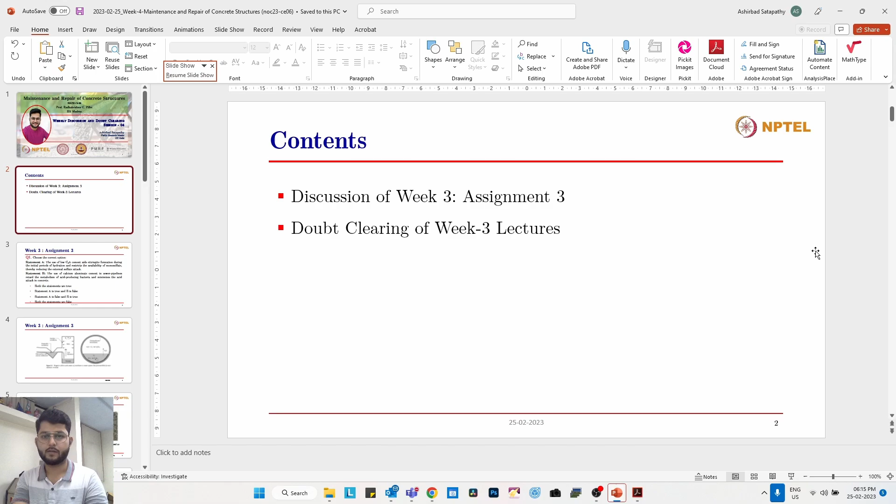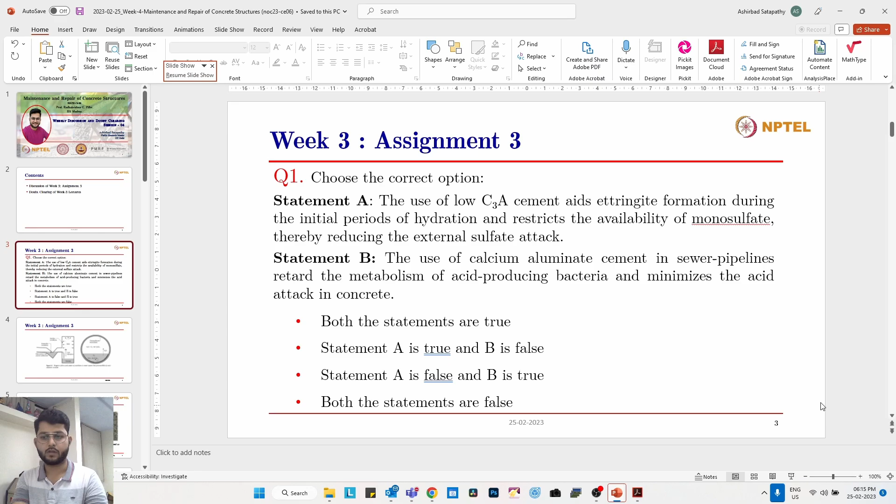Yes, I have allowed your mic, Dr. Satish and N. Sindhu. Yes please, you are audible and the screen is also visible. Okay, and when I'm changing the slides, is it also working? Right now nothing has changed, only the title is shown. Can you check now, can you tell me now? Yes, yes, it is changing, okay. Alright, okay. Thank you, Dr. Satish.

Yes. It says that use of low C3A cement means we are talking about sulfate resisting cement. It aids ettringite formation during the initial periods till the available C3A reacts with external sulfates. After that, since C3A is not available, formation of tricalcium sulfoaluminate will not take place. So statement A is correct.

Now coming to statement B, the use of calcium aluminate cement in sewer pipelines retards the metabolism of acid producing bacteria and minimizes the acid attack. That has been found to be correct. So both these statements are correct.

Okay, so you want to say that both the statements are true. Yes, thank you. Thank you, Dr. Satish. So before going to the second statement, I want to say something about statement A.

When the C3A content in the cement is low, what essentially happens during the availability of sulfates is that when sulfates are present, the ettringite is stable. This ettringite to monosulfate conversion is kind of a chemical balance equation, so both the ettringite and the monosulfate phase coexist in the cement pore solution. But depending on the amount of sulfates present in the pore solution, one of these phases is more favored. When sulfates are more, ettringite formation is favored, while monosulfate is less in amount.

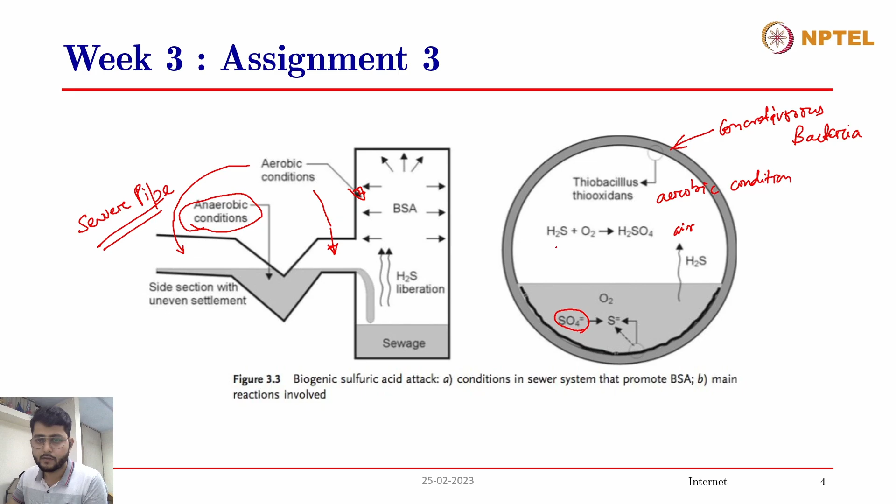Now, under anaerobic conditions, the sulfate in this sewage water gets converted to sulfide, and this hydrogen sulfide gets released into the air. These thiobacillus thiooxidans are present inside the sewer pipes generally in these kind of conditions - these are bacteria, also known as concretivorous bacteria. These bacteria, in aerobic conditions, facilitate the oxidation of this hydrogen sulfide, so oxidation takes place, and in turn forms this sulfuric acid.

This sulfuric acid can be in the range of 10% concentration, which will effectively reduce the pH to less than almost 1. This 10% sulfuric acid will cause deterioration of the concrete in these portions of the sewer lines - you can also see this in the lecture slides and video. The top of these sewer pipes gets affected, the concrete over there gets deteriorated due to the sulfuric acid attack caused by these concretivorous bacteria.

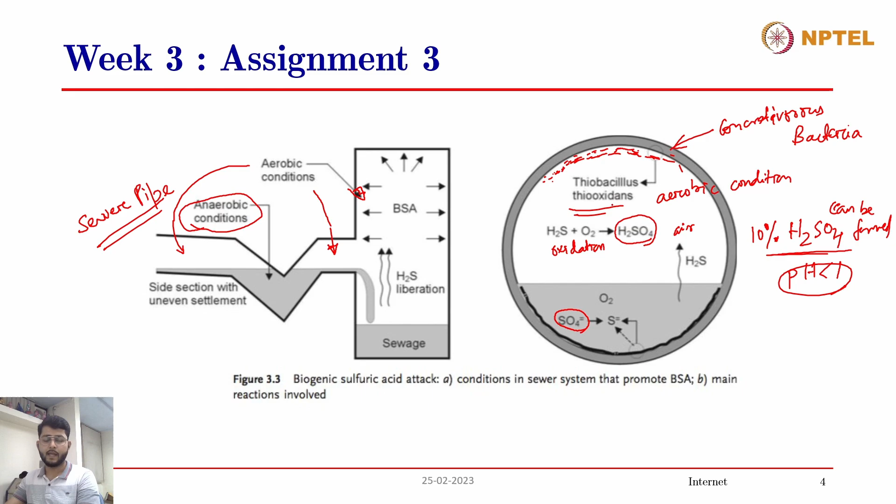When you're using CAC cement or calcium aluminate cements, the kind of hydration products formed in these cements are stable in the case of sulfates. When sulfate attack takes place inside the concrete, these hydrated phases are stable, and therefore there is no deterioration of concrete due to the sulfate attack.

This picture has been taken showing the microstructure of the CAC cement, from Gosselin et al. in 2009. You can see this is a picture of a calcium aluminate cement mortar specimen, which was exposed to MgSO4, magnesium sulfate, which is one of the harshest chemicals to cause sulfate attack in concrete, because it leads to brucite formation.

Brucite formation. Brucite is Mg(OH)2, less soluble in water. Not just sulfate attack, but the magnesium also takes part in this reaction in the case of magnesium sulfate attack, and this forms brucite, which is less soluble in water and which will also result in expansive stresses and cracking.

But you can see, magnesium sulfate is regarded as one of the harshest chemicals that cause sulfate attack in concrete. But in the case of using CAC mortar, you can see that when this mortar specimen was exposed to magnesium sulfate for almost 90 years, this is the condition of the concrete over there. So not much deterioration has taken place.

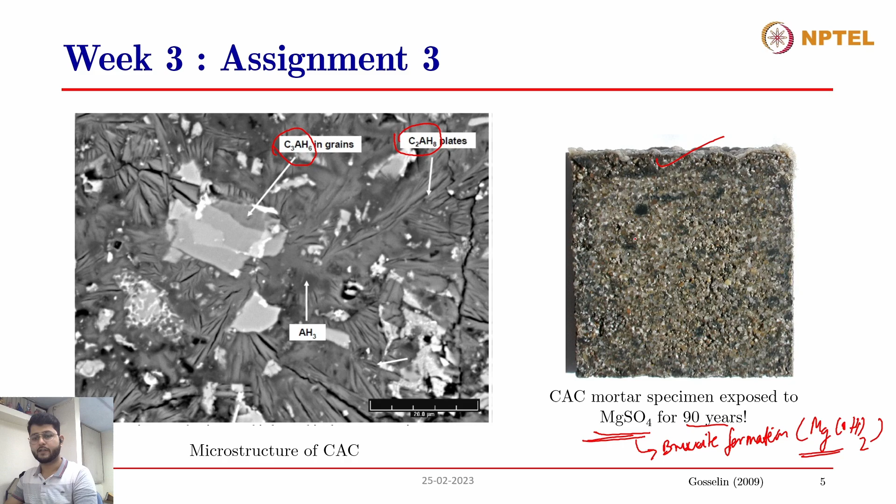So therefore, the answer to this question: the use of calcium aluminate cement in sewer pipelines can retard the metabolism. Since the concrete in the case of calcium aluminate cement is resistant to sulfate attack, that will minimize the acid attack in concrete. So statement A and statement B both are correct. This is the answer.

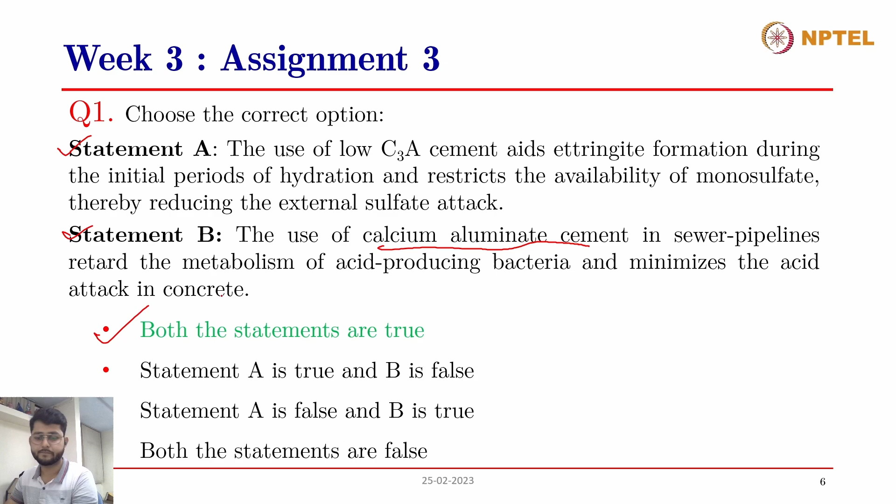Can somebody answer this question and tell? Let's consider all of these statements one by one. Can you also give the reasons why some of these statements are true and some of them are false?

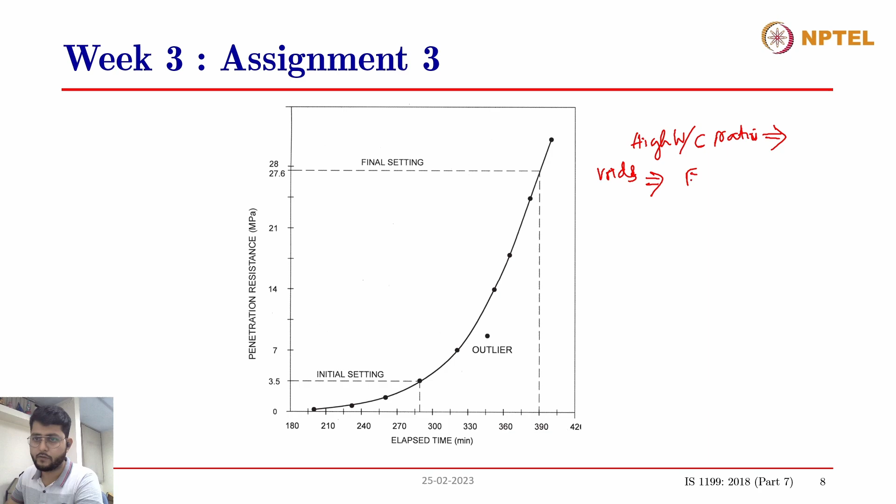I'll go to the next slide. So when you're using a high water to cement ratio, the voids caused are entrapped air voids, and these are typically very high in size compared to the capillary pores.

So essentially, what happens in case of ice accretion or ice lens formation is that suppose this is a concrete, and you have certain capillary pores that are partially filled with water. Now, when freezing conditions exist, or when the water inside these capillary pores tries to freeze, they increase in size as the volume of ice is higher than the volume of water, and they induce cracking in the concrete in the case of capillary pores, due to the expansion.

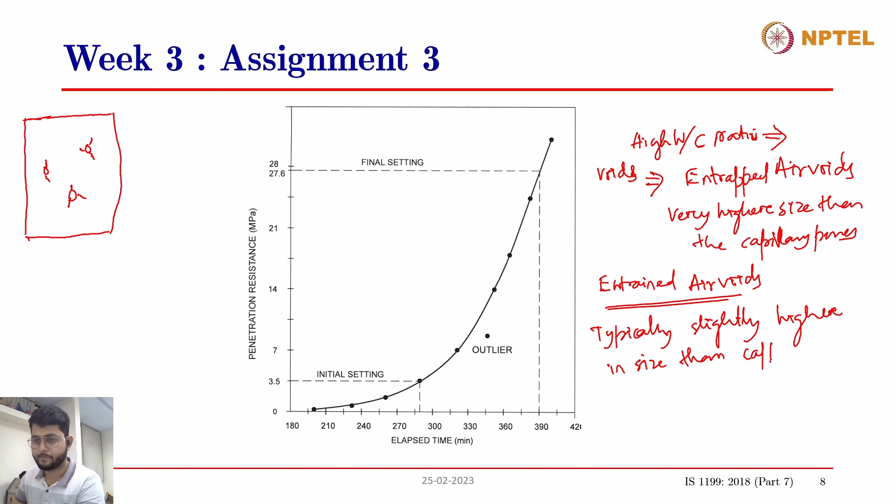So what happens in the case of entrained air voids is that when these capillary pores are present inside the concrete, and there is another entrained air void nearby, the water in the partially filled capillary pores, instead of freezing in these pores, gets sucked out into the entrained air voids, which have a larger volume and hence a larger space for the water to freeze. When the water freezes inside these entrained air voids, it will not create any expansive stress, and hence there will be no cracking inside the concrete.

And when this water melts, in case of thawing cycles, this water again gets sucked back by the capillary pores.

So in the case of entrained air voids, there is also what is known as the void spacing factor. The size of the air voids should be comparable to that of the capillary pores, and also the number of voids present inside the concrete should be enough, and the void spacing should be small enough so that the capillary pores have a nearby air void where the water can escape into.

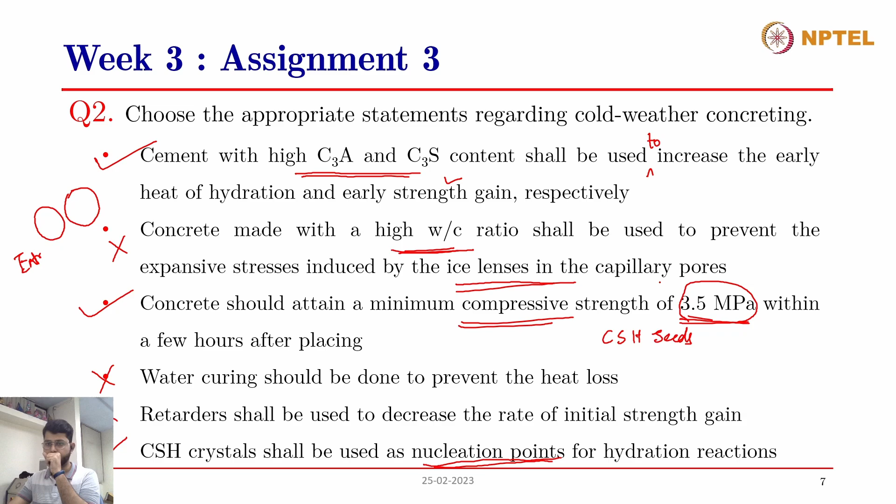The last statement was: CSH crystals shall be used as nucleation points for hydration reactions. This has also been discussed in the lecture. There are certain chemical admixtures that come as CSH seeds, and these can be used to accelerate the nucleation and hydration reactions. So the correct answers are these three statements.

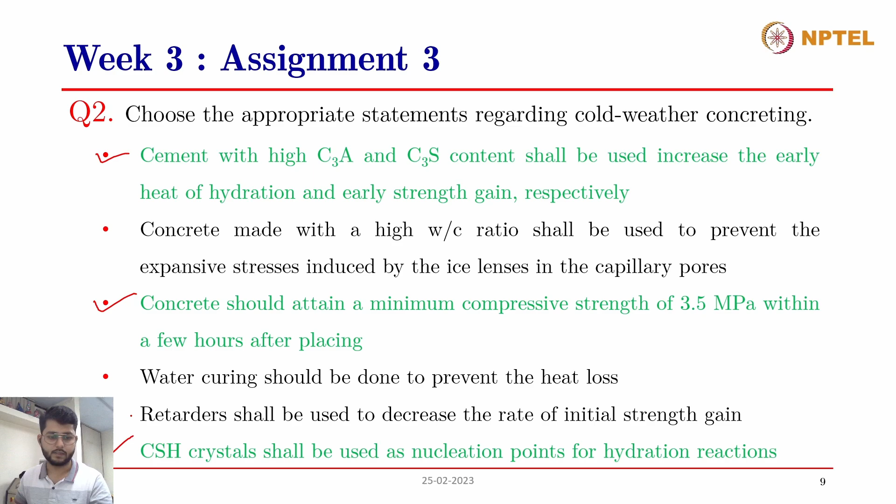Just give me a moment. Okay.

Moving on to the third question: which of the following statements are true about shrinkage in concrete? The options were: plastic settlement or subsidence of concrete is a type of shrinkage; replacement of cement with SCMs can decrease the plastic shrinkage; thermal shrinkage is more evident in thick elements compared to thin elements; good curing can reduce autogenous shrinkage; good curing can reduce plastic shrinkage.

Can somebody answer this question and also give the reasons why they think some of the statements are true and some are not? Yes, Sindhu, Manisha, do you want to try? I would like Satish to answer. Yes, go ahead.

First one: plastic settlement or subsidence of concrete is a type of shrinkage. No, this is not a type of shrinkage, it was told clearly in the lecture. Next: replacement of cement with supplementary cementing materials can decrease the plastic shrinkage. Yes, because permeability will be lesser, it will be better and more compact concrete, so it will definitely decrease the plastic shrinkage. So this is a correct statement.

Then next: thermal shrinkage is more evident in thick elements compared to thin elements, because lots of thermal gradients will be there within the body of mass concrete. So there will be chances of thermal shrinkage, particularly at the bottom of a dam section etc., where we have larger dimensions.

Then: good curing can reduce autogenous shrinkage. No, because this autogenous shrinkage flows out of chemical reactions taking place in the cement paste, it will not reduce autogenous shrinkage.

And the last one: good curing can reduce plastic shrinkage. Yes, because plastic shrinkage takes place because of evaporation of water, so good curing will supplement the loss, so it will reduce the plastic shrinkage. Right, okay, thank you.

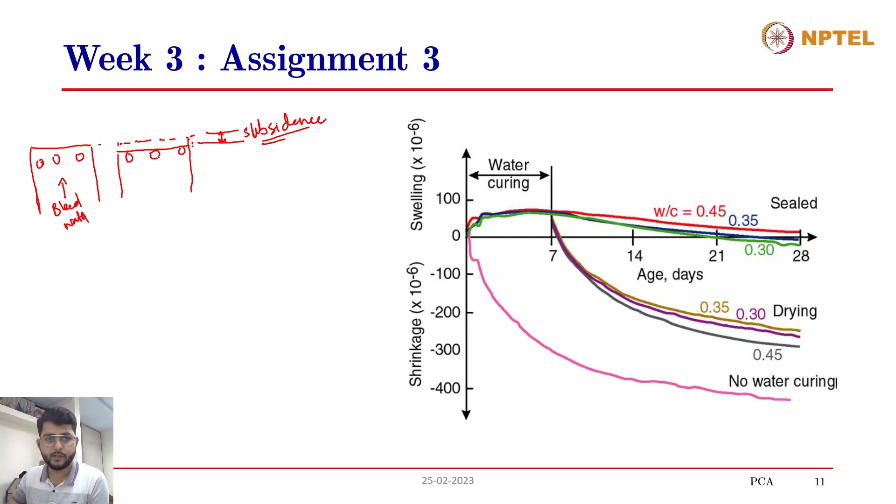This is known as plastic subsidence, and this is not shrinkage. The plastic shrinkage occurs in a similar manner, but what happens is when the surface water dries out and it's trying to dry out, and the bleed water is coming to the top, the portions between the reinforcement have a tendency to subside and shrink, while the concrete just above the reinforcement will not have sufficient amount to go down and shrink as much as the portions between, and therefore cracks are induced. Let me magnify this and draw again.

Let's say this is a concrete surface, and these are the reinforcements. Whenever plastic shrinkage is occurring, the portions between the reinforcement can shrink and sag like this, while the portion above the reinforcements won't have sufficient space to go down and shrink, so they will try to travel to the intermediate locations and thereby cause cracking over the reinforcement. The aggregates travel to these locations where they can accommodate for the shrinkage that is happening, and that creates cracking at these locations because there are expansive stresses. This is typically what happens in plastic shrinkage.

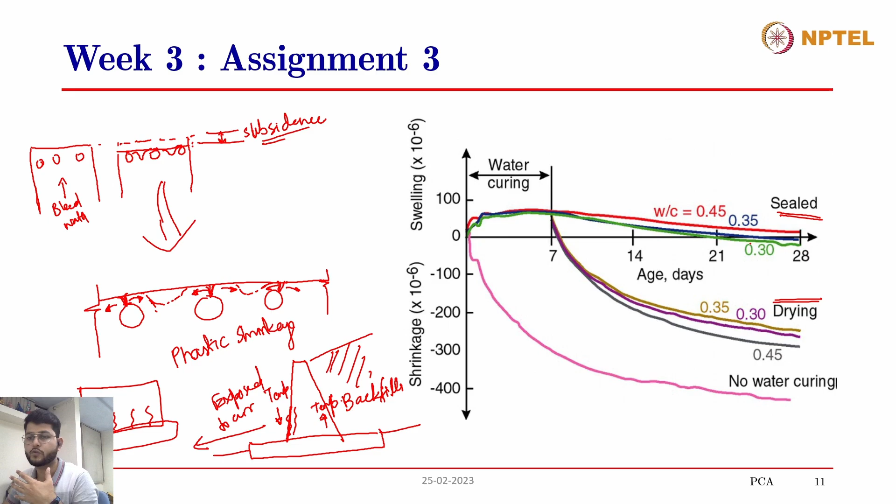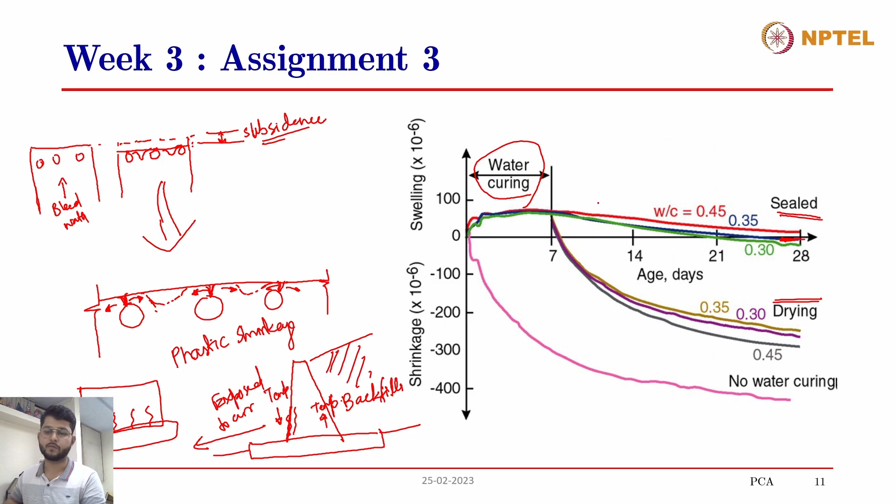But when compared with the sealed specimens, where the concrete elements are not exposed to any drying, the water inside the concrete is intact, and we are also providing curing water from outside, we can see that almost all of the shrinkage is getting compensated by the swelling. Therefore at 28 days there is almost no dimensional change in the concrete elements. So this is the effect of water curing on shrinkage - due to swelling, it compensates for some of the plastic or other shrinkage happening inside the concrete.

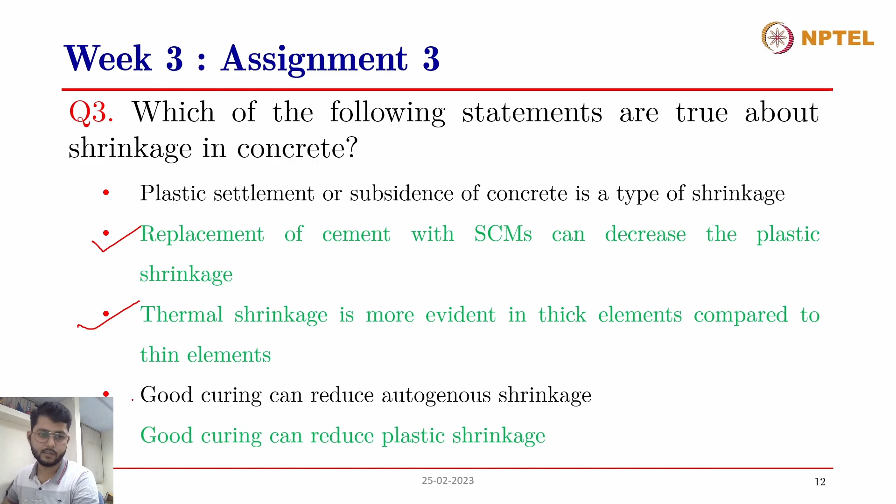Moving on, this was the third question, and the answers were these three statements: replacement of SCMs is correct, thermal shrinkage is more evident in thick elements, and good curing can reduce the plastic shrinkage.

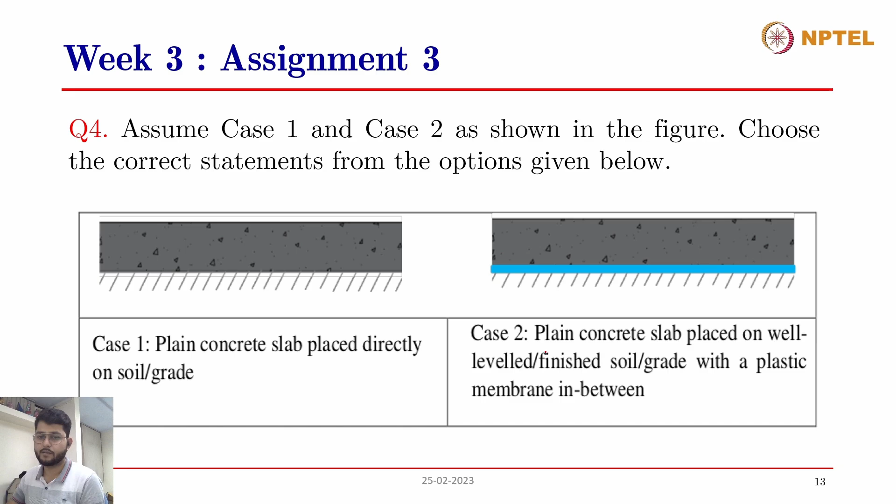Moving on to the fourth question. Assume case 1 and case 2 as shown in the figure. Choose the correct statements from the options given below. Case 1 has a plain concrete slab placed directly on soil or grade. Case 2 has a plain concrete slab placed on a well leveled, finished soil or grade with a plastic membrane in between.

So the options were: in case 1, plastic shrinkage and plastic shrinkage cracking can occur; in case 2, plastic shrinkage and plastic shrinkage cracking can occur; in case 1, plastic shrinkage cracking cannot occur; in case 2, it cannot occur; in case 1, drying shrinkage cracks can occur after a few weeks or months; in case 2, drying shrinkage cracks can occur after a few weeks or months. Which of these cases will have plastic shrinkage and drying shrinkage, and which will not, and why? Can somebody answer this question?

In case 1, plastic shrinkage and plastic shrinkage cracking can occur - this is correct because concrete is directly placed on grade, so unevenness is caused, making this a fit case for plastic shrinkage as well as cracking. Whereas in the second case, concrete is laid on a plastic membrane, so the situation stated for the first case, plastic shrinkage and cracking, will not take place, because it's a smooth base there.

So these two are correct. In case one, we can always see this - last but one, drying shrinkage cracks can occur after a few weeks or months. Yes, because there's unevenness at the bottom, there'll be some grains, etc. Situation is right for drying shrinkage cracking after a few weeks or months. Right, so three statements are correct. In case 1, it can happen, right? Plastic shrinkage, yes. Okay, these three are right and the others are incorrect. Thank you, Dr. Satish.

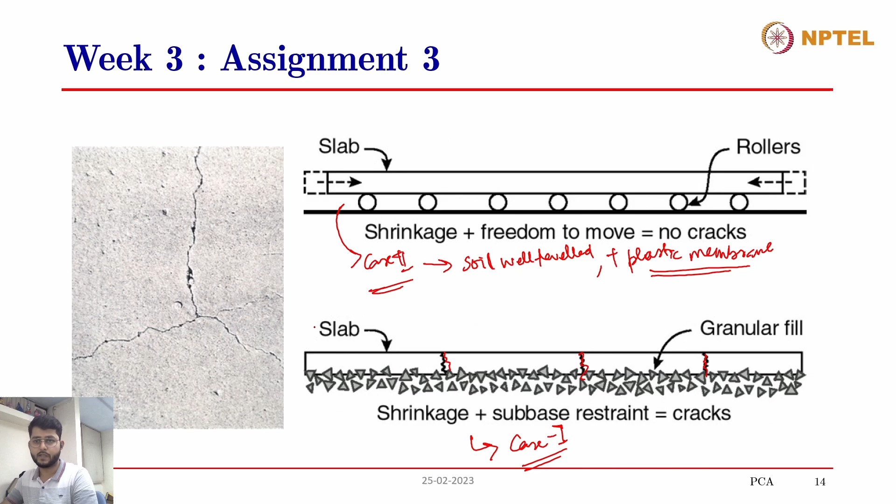So this is what happens - therefore plastic shrinkage cracking can occur in case one, while it cannot occur in case two. So the first statement is correct, and the second statement, that in case two plastic shrinkage cracking cannot occur, is also correct. Again, as mentioned by Dr. Satish, since it is not properly leveled, that will create deformations, allowing for deformations to occur inside the concrete, and that will promote the plastic shrinkage again.

Secondly, drying shrinkage cracks can occur in case one, because since it is directly in contact with the grade or the soil, water can transport freely from the concrete to the soil or otherwise, and that will promote the drying of the concrete inside, which might create drying shrinkage cracks. While in the other case, it has a plastic membrane in between that will restrict the flow of water. So in case one, drying shrinkage cracks can occur, while in case two, it won't. So these are the correct answers.

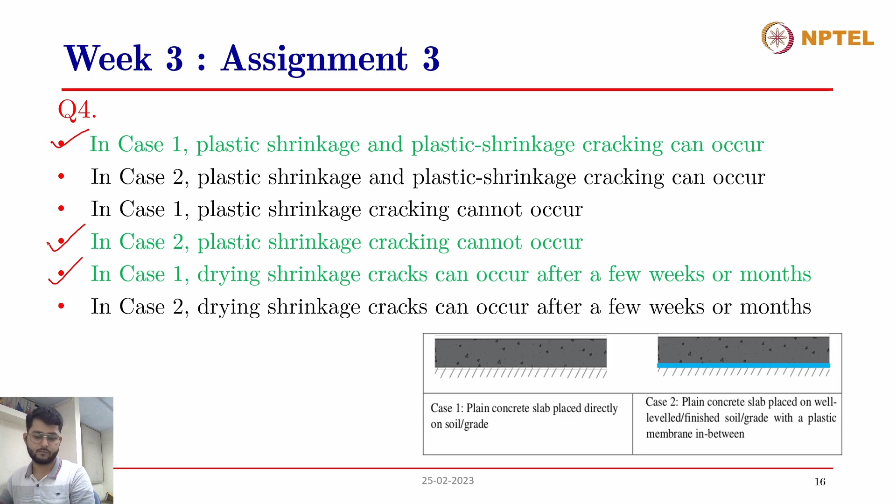I will answer this question. First one is hairline shrinkage cracking - this matches with the second option, evaporation of water from concrete. As discussed in previous questions, shrinkage cracking will occur, so A goes well with 2. Now, flexural cracks - these cracks will take place at right angles to the direction of the main reinforcement, so no such option has been given. There is nothing to match with anything in column B.

Now at C we have D-shaped cracks, so D cracks - this is due to freezing and thawing cycles, repeated cycles. It was told in the lecture with photographs, etc.

That shape is more or less D-like, so we call these D cracks. Then D is map crack. Here we have the first option: alkali silica reaction and delayed ettringite formation. This goes well with the number of cracks, like a map of cracks, very small size but scattered.

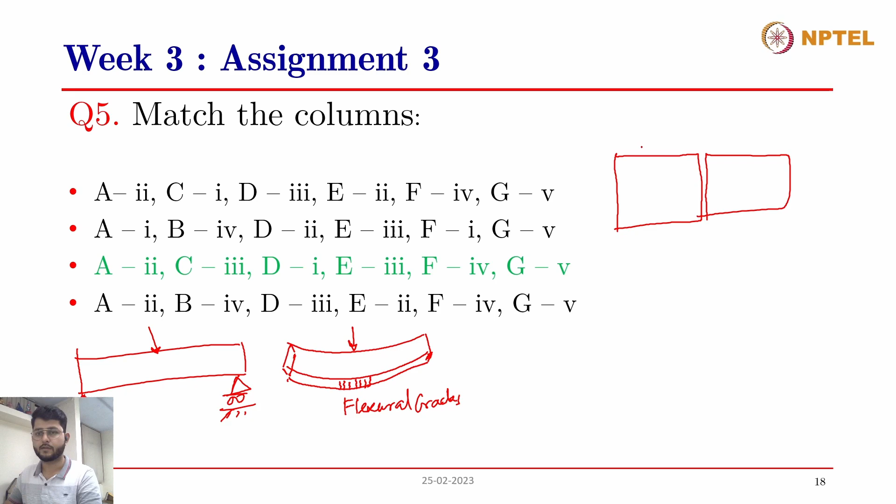What essentially happens is, when slabs are cast, there are joints between the slabs where these joints are saturation points. Whenever these slabs are exposed to water or humidity, this is the saturation point, and these joints are generally filled with water. Due to this availability of water, it can get inside the concrete elements, and due to the freezing process, it causes these cracks, appearing in the shape of D, away from the saturation points. This is how it appears.

So this is how it appears in the shape of a D. This is the D cracking that is being talked about in the case of freeze thaw resistance, or freeze thaw attack on the concrete structure. So this is the D cracking in concrete.

Then map cracks. These map cracks occur generally in ASR or DEF, which is alkali silica reaction. Map cracks generally do not follow a certain pattern, as in the case of flexural cracks or D cracks. Those have a certain pattern, because they happen around points where there is water saturation. But in case of ASR or delayed ettringite formation, this is essentially happening at a microstructural level.

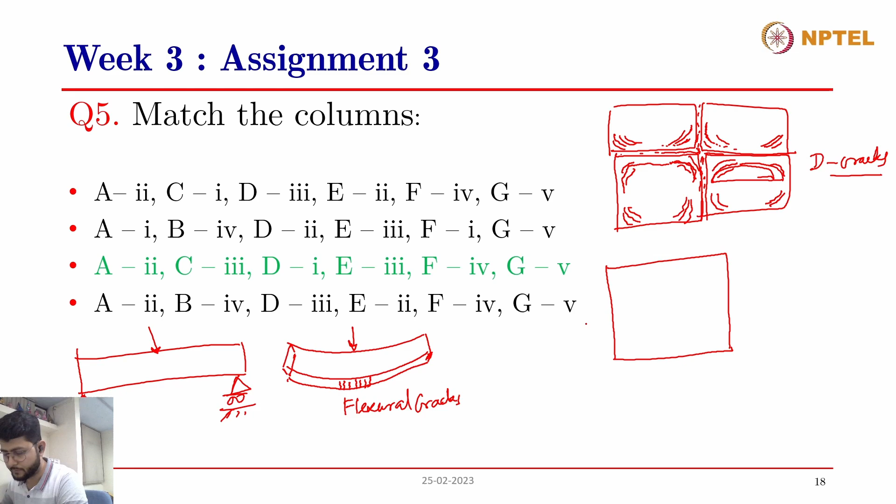What essentially happens is above around 70 to 80 degrees Celsius, the formation of ettringite is reduced or minimized. Ettringite formation is not favorable at that temperature, and also the sulfates get diffused into the CSH gel that is being formed. Due to the insufficient availability of sulfates, ettringite is not formed, and monosulfates are formed instead inside the concrete.

But when the temperature cools down at a later age, and the sulfates diffuse out of the CSH, and there is sufficient availability of sulfates inside the concrete, these monosulfates react with the sulfates again and form ettringite instead of monosulfates. These ettringites have a higher volume and create expansive stresses inside the concrete, inducing cracks.

Since this is taking place at a microstructural level inside the cement pore solution, there is no defined pattern to these cracks, and therefore they appear like map kind of cracking. This is the kind of cracking that occurs in the case of both ASR and delayed ettringite formation. These are the map cracks.

In DEF or ASR, both cases happen at a microstructural level, so this can happen wherever there is sufficient amount of cement paste or aggregate present. We know cement paste and aggregate are present all throughout the concrete element. Therefore, they do not have a certain definition of the type or pattern of cracks that occur.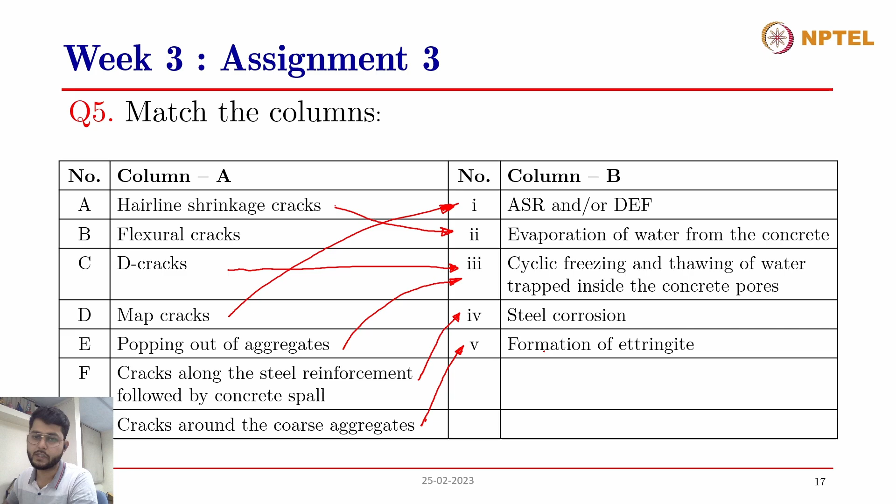But these cracks due to the normal formation of ettringite are very thin or micro cracks, and that won't affect the concrete - I mean, it won't promote the degradation of concrete. This is a natural process that happens in concrete. So these are the answers to this question.

Coming to the last question, the sixth question: consider two mixes A and B, with mix A having an aggregate to cement ratio of 0.8 times that of mix B, and a water to cement ratio similar to that of mix B. Choose the right statement about the autogenous shrinkage in these two mixes, considering all other parameters are the same.

So mix A has an aggregate cement ratio that is about 0.8 times that of mix B, while the water to cement ratio is the same. Which of these statements are correct? Unless water to cement ratio changes, autogenous shrinkage does not vary among the mixes. Mix B will have lower autogenous shrinkage than mix A. Mix A will have lower autogenous shrinkage than mix B. Data is insufficient to comment on the trend of autogenous shrinkage.

It is stated that mix A has aggregate cement ratio of 0.8 times, so aggregate content is comparatively lower. Higher aggregate content means there will be lesser autogenous shrinkage. So the first statement is incorrect. Mix B will have lower shrinkage, yes, because of higher aggregate content relatively as compared to A. The third statement is incorrect, and the fourth is also not correct. So mix B will have lower autogenous shrinkage than mix A because of higher aggregate content. That is correct.

As you have rightly pointed out, when keeping the water to cement ratio constant, and the aggregate to cement ratio is decreasing, that essentially means the cement content in mix A is greater than in mix B. Since the aggregate content is less in mix A than B, the cement content is going to be higher in mix A than in mix B, with all other parameters kept same. Cement is the most reactive part in the concrete, and it contributes to the autogenous and chemical shrinkage. So when the cement content is higher in a mix, that will have a higher autogenous shrinkage compared to a mix having lower cement content. So this is the correct answer: mix B will have a lower autogenous shrinkage than mix A.

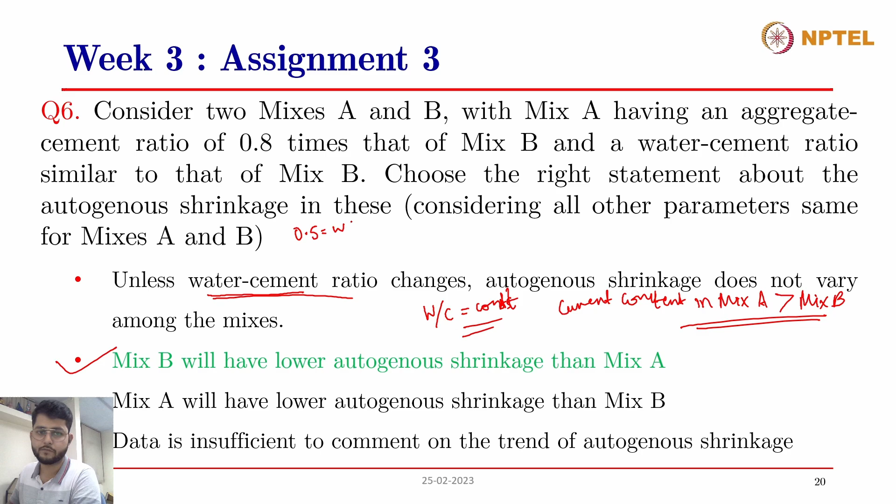It has been mentioned that unless water to cement ratio changes, autogenous shrinkage does not vary among mixes. This is not a true statement, because even if the water to cement ratio is the same, let's say two concretes both have water to cement ratio equal to 0.5. If concrete X has a cement content of 300 kg per meter cube, and Y has a cement content of 500 kg per meter cube, keeping the water to cement ratio the same, X will have a water content of 150 kg per meter cube, while Y will have a water content of 250 kg per meter cube. The water to cement ratio is still the same, but since Y has higher cement content, Y will have higher shrinkage. So this is not a true statement. The only true statement is that mix B will have a lower autogenous shrinkage than mix A.